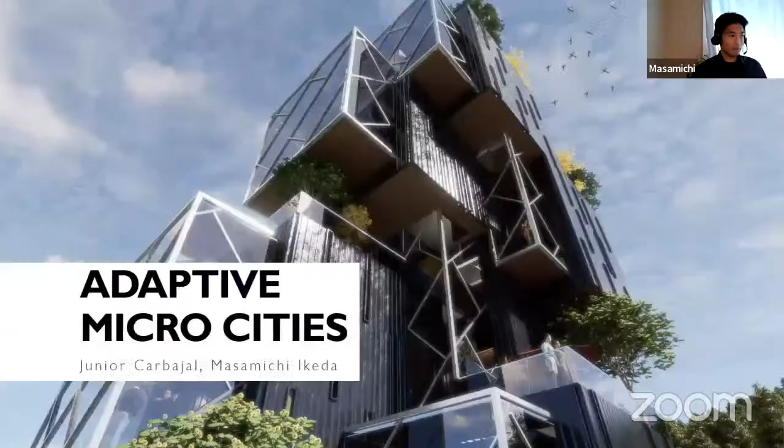Okay, Junior, do you have control now? Yeah, let me check real quick. Okay, sorry about that.

Okay, so first off, we'd like to thank the AISC for giving Masamichi and I the opportunity to present our idea on your platform, and most of all, thank you for picking our design as one of the top three finalists. I read the other contestants' ideas, and I'm very impressed with their creativity and what they have to offer. It really is an honor to be sitting here presenting next to them.

So the title of our project is Adaptive Microcities, because we're intrigued with the idea that architecture, when utilized as a vehicle and injected with human energy, can have the power to rejuvenate desolate spaces and turn them into desirable places—places we work, places we live, and places we play. We begin by asking ourselves: does architecture have the ability to draw people in? And by delivering those people, can their existence help change a community?

And so we looked for an opportunity to explore this idea further and found the Linton neighborhood here in Portland, Oregon, located about eight miles northwest of Portland, to be a really great fit. Now, the problem with this site is that historically, the Linton neighborhood has been damaged with industrialization and the abandonment of smelting plants, lumber mills, and oil refineries. What was once a practical use of Linton's riverfront has now become its own social demise.

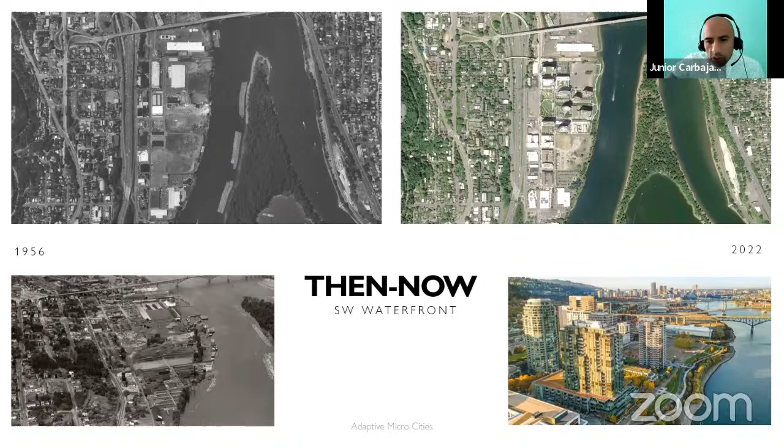And so again, we can begin to revitalize the Linton neighborhood, or better yet, create a microcity. On the site, we aim to explore this idea by creating a park with numerous activities that can harvest human presence, like an amphitheater for live music concerts or a farmer's market, just to name a few.

And of course, building a catalyst that can spearhead the movement, one that can capture the essential elements of everyday life, which we believe is work, life, and play — what we all pretty much do.

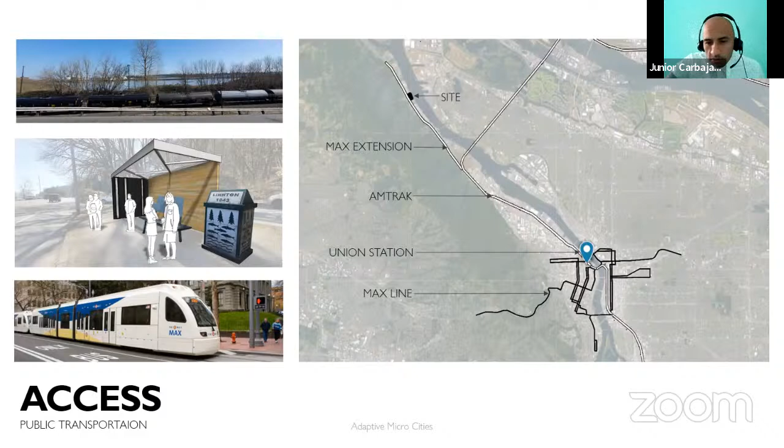And so we like the idea of repurposing the existing train tracks by extending the current MAX line into the Linton neighborhood, essentially connecting to a greater mass transportation network at our site, possibly utilizing the same design language as our building for the stops, to sort of hint at the main stage down the line.

And so given the constraints, we wanted to build a system that is simplistic, could speed up constructability, and have the flexibility to be assembled and disassembled for repurposing in other locations — essentially a panelized system, like a kit of parts. And we quickly realized that these qualities are inherent in steel construction.

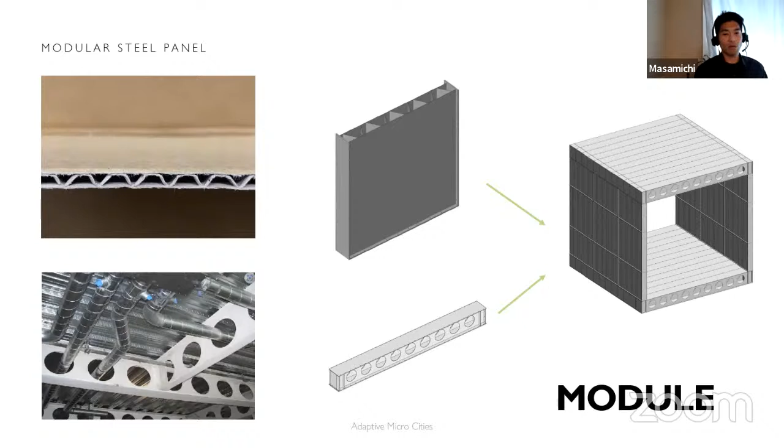A 30 feet by 30 feet cube box is constructed with the combination of the modular panel and box beams. The corrugated steel plates inside play an important role in the structural strength. Capacity against compressive shear and moment load can be increased by the corrugated steel.

And so now that we have these cubes, we allow the size of the site to dictate the overall shape by going straight up, acknowledging that the homes on the hillside sit higher, which permits our building to go vertical. We start looking at the steps for how this thing began to take shape.

So by first stacking the cubes to accommodate the program needs, and then step number two, to create a microcity, we partition these cubes into three primary groups. And then step three, shifting them in the x-axis to create summer shading overhangs for south-facing facades.

Moving on to step four, we shift them in the y-axis to create terraces and public spaces. And then step five, we shift them one last time in the z-axis to interstitch those volumes together and lower the overall height. Finally, we extrude them one last time, extruding cubes inside cubes to maximize the view of the river.

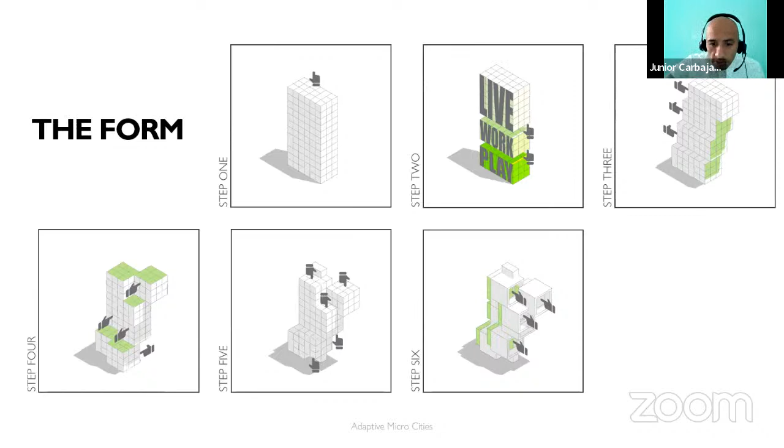This allows indirect north-facing light for natural illumination, and this final shift also further shades the south-facing facades from the summer heat, but also allows the winter sunlight to enter and passively warm up the spaces.

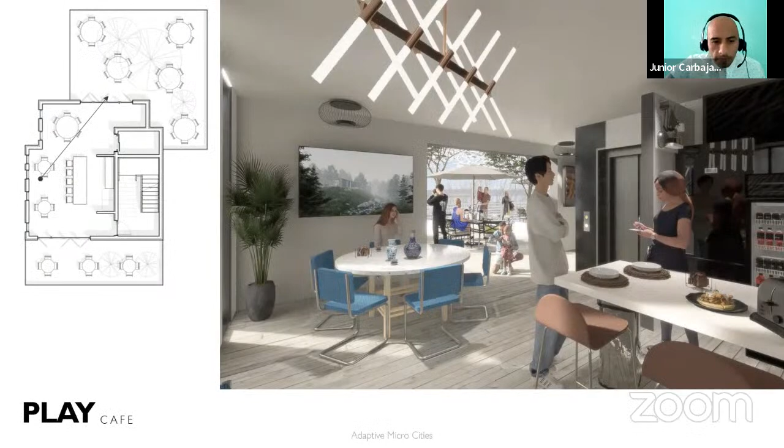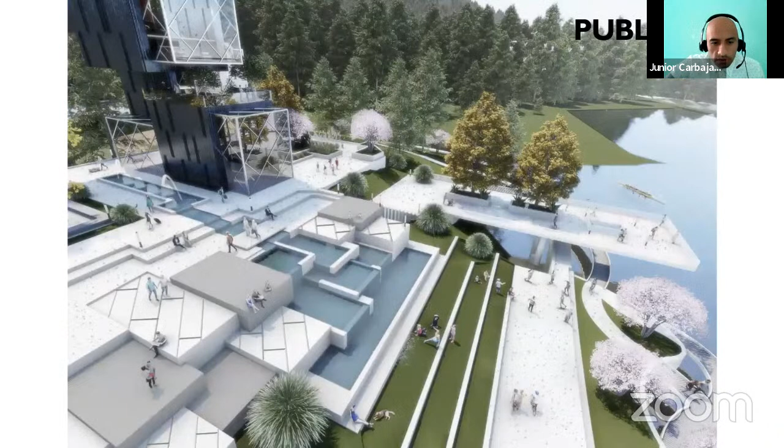So then we step out to the outside and we can see what this thing could look like in typical Oregon rainy weather. Another view from a different angle at sundown. And then from above, looking at the public rooftop gardens at the resident levels, and another 3D perspective of the public space where people can gather and collaborate.

And so speaking of collaboration, we would like to personally thank Jim for sharing his vast knowledge in steel fabrication and building erection experience. It was because of him and his team at Alpha Steel that we were able to look at this design in a whole new lens and gain so much more knowledge, not only for this project, but for our personal careers and development.

We had the opportunity to visit a state-of-the-art shop and learn so much more about steel and how it's utilized to push the boundaries in the AEC industry. During our conversation about how this thing could be erected, we pretty much stayed focused on new ways of construction: how to speed up the construction, the modularity of the system, transportation, sustainability, and of course, costs.

Okay, now this is an exploded structural model, and there are a total of 8 cubes surrounding the core structure to provide the habitable space to the building. The core structure is located at the center of the building to support these cubes, just like a tree trunk.

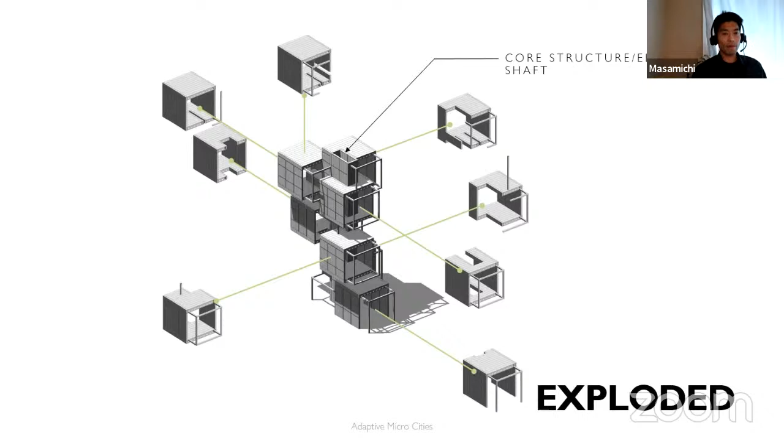There's another reason why we selected the size and shape of the wall panel and the beams. The rectangular box and square modular panel are very efficient when it comes to transportation. They can be stacked on each other horizontally and vertically without too much wasted space. Modular panels and box beams can be loaded on a flatbed truck without exceeding height and width limitations in regulation - for example, in Oregon, 14 feet for the height and 8.5 feet for the width.

Now, let me talk about the assembly. The core structure plays an important role to support the cube boxes, but it can also be used as a tower for the tower crane. Since the site has limited space, it could be difficult to bring large equipment.

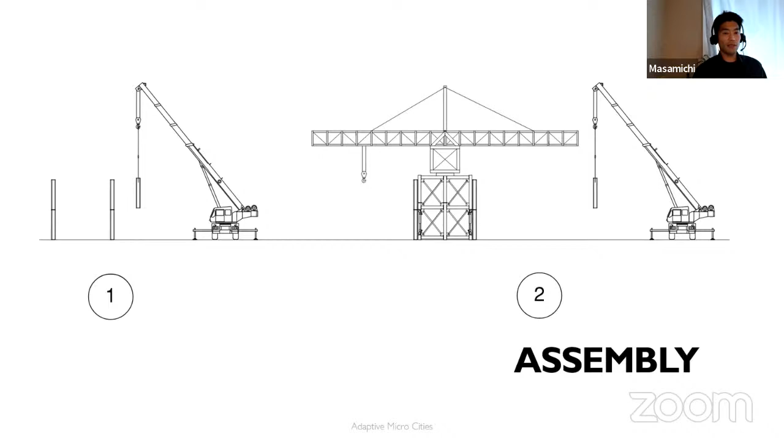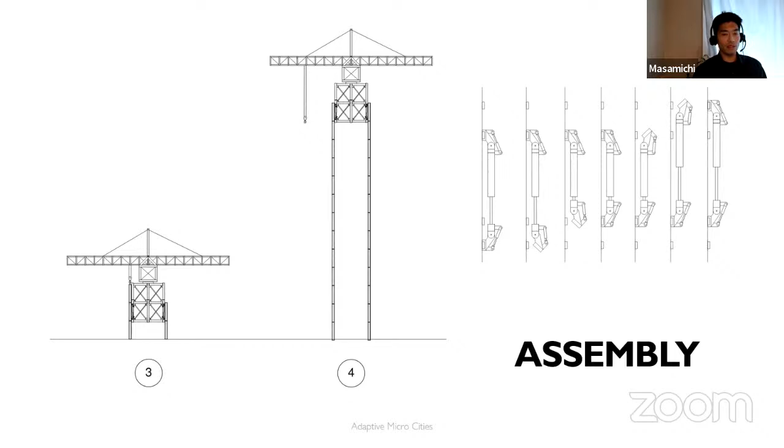So step one, with a small crane, the core structure is installed until a certain height. Step two, install the tower crane inside the core structure, and then install the crane boom. Step three, the tower crane installs more wall panels of the core structure and jacks up the tower crane itself with a hydraulic cylinder, similar to climbing tower crane technology. This operation is repeated until the wall reaches the required height - that's step four.

Next, step five, the cube boxes are assembled on the ground. Just because of constructability, it's much easier to assemble everything on the ground. However, the cube box is a little too heavy for the tower crane - we estimated about 50 to 80 tons. So our idea is that temporary bracing is installed for the cube's stability until the cube is completely attached to the core structure. Then the cube is lifted up with multiple hydraulic cylinders along a guide rail, as shown in the pictures, attached to the core structure. This operation is repeated for the other cubes as well.

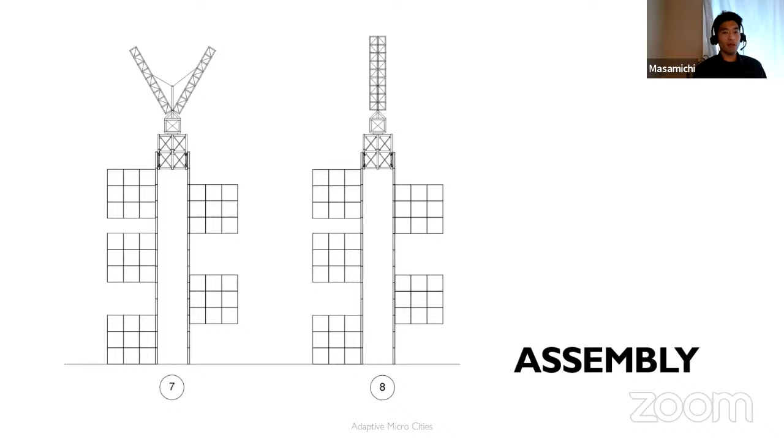So once all the cubes are installed, and then all components are installed, the crane boom is completely vertical now. Then we lower the tower crane, install it inside the core structure, and keep it there. Disassemble the tower crane and remove a part of the core structure. Install the staircase and elevator at the end.

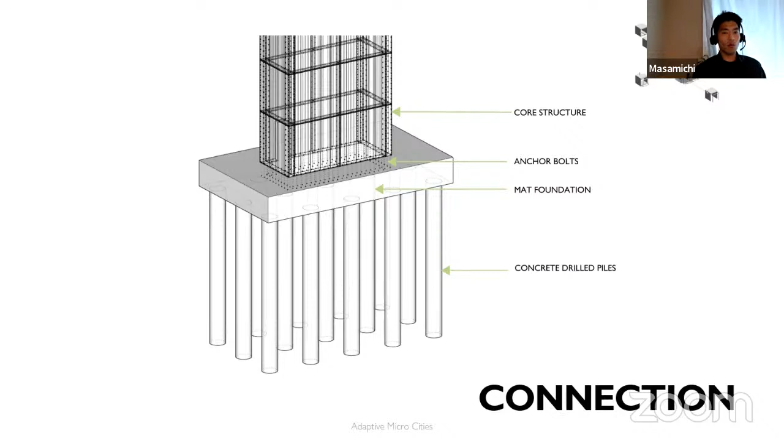Foundation of the core structure is crucial. The core structure is attached to the mat foundation or pile cap over the concrete drilled pile. When a wall of the core structure is installed, the erector will work on the platform. However, the erector still only has access to the panel from inside, so the connection is a little tricky. So we came up with this idea: keyways were provided on the outer wall of the panel so that the erector doesn't need access from outside.

The keyway is slightly tapered so that the connection has tight contact, and then the wall panel is slid horizontally to connect the keyway together. This is a corner connection that's very similar to the other connection.

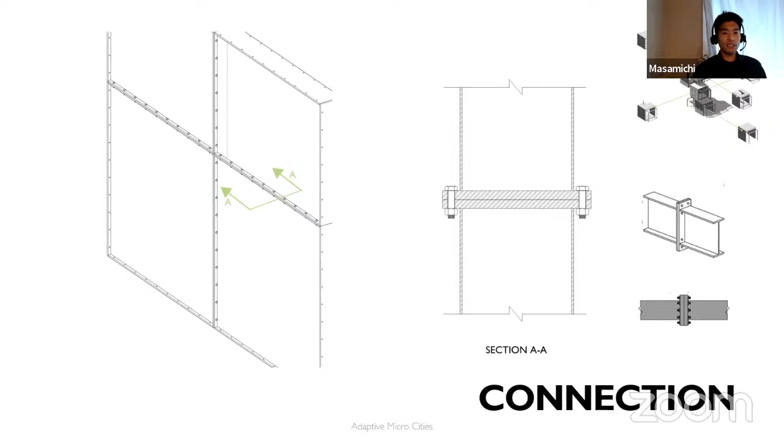Since cube boxes are assembled on the ground, the erector has access to both sides. This is similar to one of the moment connections or a pipe flange connection. They are easy to disassemble; our goal is to make the material reusable.

To enhance construction speed, some utilities are installed to the wall in advance, both inside and outside. When a wall panel is connected, the utility line also connects together. So the channel attached to the outer face of the wall panel carries the IMP, and the channel attached to the inner face is the hat channel. Our goal of the connection is that we can disassemble a wall board or IMP easily so that the wall panel is reusable.

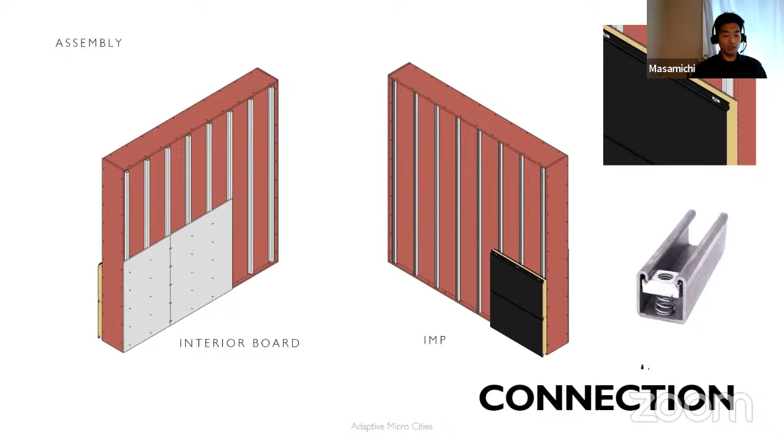This is a beam to the wall connection. Again, this is very similar. So everything is bolted to the connection.

Okay, so now the beauty of our modular system is its adaptability and flexibility. With this concept, we found that we can overreach this idea of the panelized system that can take many different shapes and also serve other purposes and aid human needs.

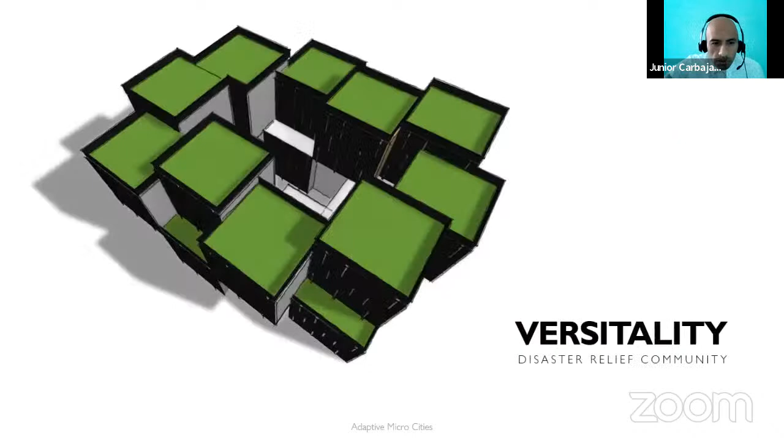For example, in a crisis, we can create shelters for the homeless, or as a resiliency effort, helping communities after natural disasters by providing temporary housing communities for survivors. And perhaps the form can take different shapes, like horizontal, creating internal courtyards for people to gather.

And so finally, to close things off, we also looked at other current systems for inspiration and feasibility, like the SIP homes being built in Santiago, Chile. Thanks to Rona for giving us some examples, the Expo 67 apartments in Montreal, Canada. And finally, a more recent project, the Coho apartment complex in Fort Worth, Texas, built strictly out of shipping containers.

And like I said, all of these precedents helped us understand and further develop our design and its possibilities. And with that, we thank you for listening to Masamichi and I. Thank you.

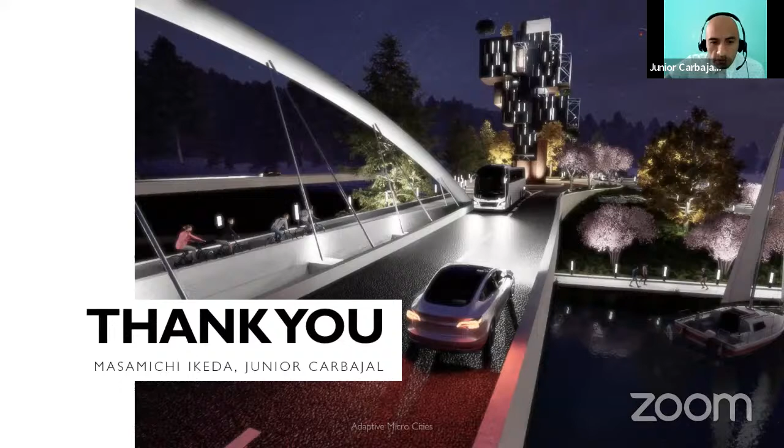I'll jump in really quick. Masa, this was great. I know we spoke to you a few weeks ago, and you did take a lot of our comments to heart. I love that you thought through the logistics, right? You're taking a very basic shape, a steel cube, and truly looking at how you can assemble it, how you can transport it. What we're looking for in our arena of design and construction right now is speed to market, and the ability to be flexible and adaptable, and you're thinking through a lot of those things. So I appreciate that, and I appreciate that you created these beautiful renderings that allow us to visualize the units and what they could become. So it is very inspiring.

The one question I would have for you is, I see how this is scalable. I see how you can easily install it and assemble it and get it to the right places. But you also spoke about human energy, right? You're looking at the interaction of something that is steel, a cube, with humans. I think what I would ask you is, when you started this process, who was your targeted user, your intended user? I see the site, I understand what you're trying to do with it, but I'm curious to hear from you.

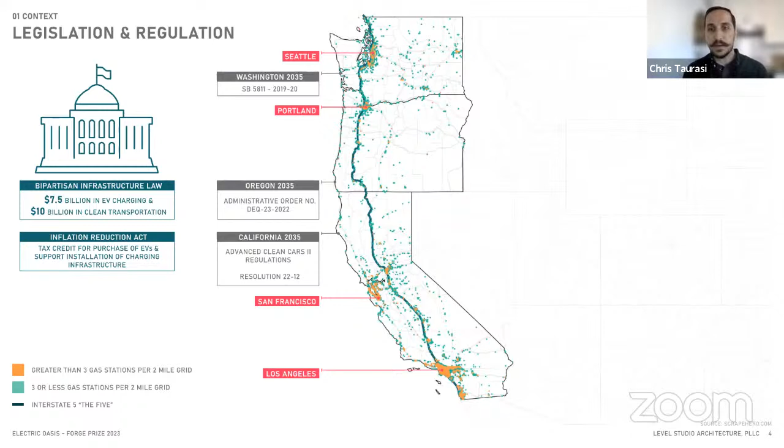So our project is really focusing on the West Coast. As you can see on the map here to the right, we utilized GIS data to locate all the gas stations that could possibly be retrofitted to meet electric vehicle needs in the future. Zooming into California, we picked a site approximately 200 miles outside both Los Angeles and San Francisco - it's important to note that 200 miles is the current charging radius for most electric vehicles.

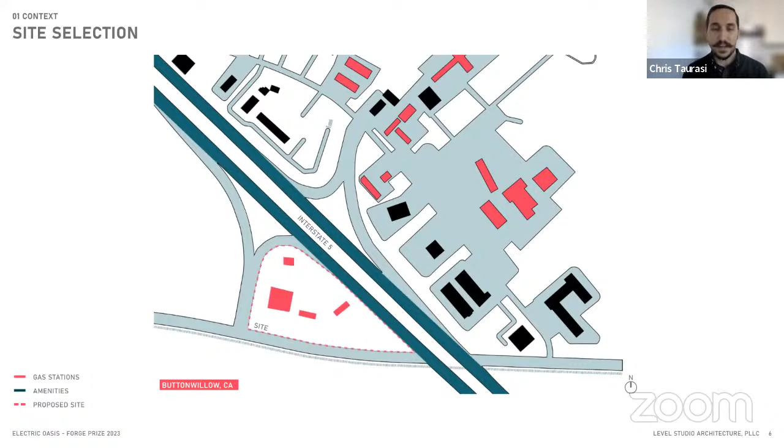And zooming in a little bit further, we picked a small rural farming community called Buttonwillow in California. It's about 1,500 people. The demographics are predominantly white and Hispanic, with a population of 33% non-US citizens, and 59% of the households have children. As you can see, this junction looks like many others along this stretch of the interstate. As you pull off, you're greeted by many gas stations, highlighted here in pink, and ours is the site on the lower left.

Right, so next we're going to dive into some of the problems we see and the opportunities that present themselves.

First, there are some major differences between gas refueling and electrical charging. Traditionally, gas station infrastructure requires larger clearances at pumps and around vehicles, while electrical charging allows for a much higher density, and the vehicles can be left unattended while charging.

Second, and possibly the greater change, is that electrically charging a vehicle takes significantly longer. On average, a gas stop takes around 7 minutes to refill a tank, while a level 2 charging station, the most common type, takes upwards of 4.5 hours for a full charge.

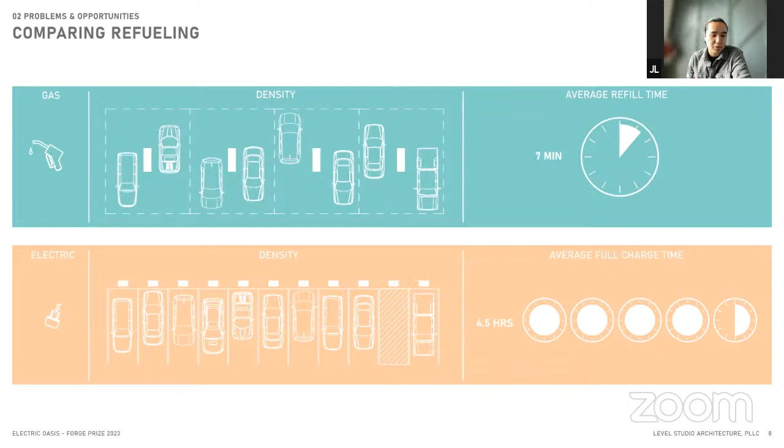So considering these major differences, it becomes pretty clear we have an opportunity to reimagine the gas station typology into something that can revitalize local economies.

Looking at the current landscape of gas stations, we typically see just 2 programs: dining and restroom facilities. With the anticipated longer stays, we can introduce more human-centric programs that the community needs. For example, on our site, we see the potential to introduce a daycare and a health clinic.

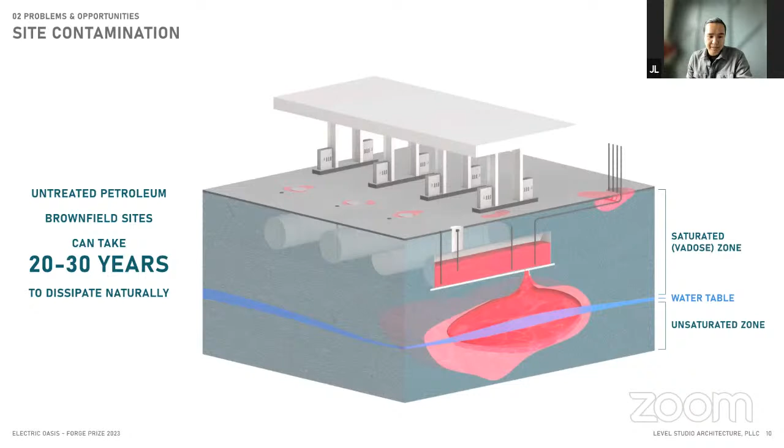Another major issue we run into when looking to reuse existing gas station sites is that they are often contaminated brownfield sites due to petroleum leaks at the surface and subsurface levels. Left to their own devices, these sites can take up to 20 to 30 years to dissipate naturally.

And finally, as we mentioned earlier, we are far behind the future demands of EV chargers. In California alone, an estimated 1.2 million EV chargers will be needed by 2030. Currently, we have just over 80,000. With all the new state and federal legislation, and more to surely follow, EV car sales in the US will only continue to grow.

Considering this impending demand, steel construction with all of its benefits, such as its ability to be mass produced, rapidly assembled, fabricated off-site, and its recyclability, quickly becomes the obvious choice to meet the challenge.

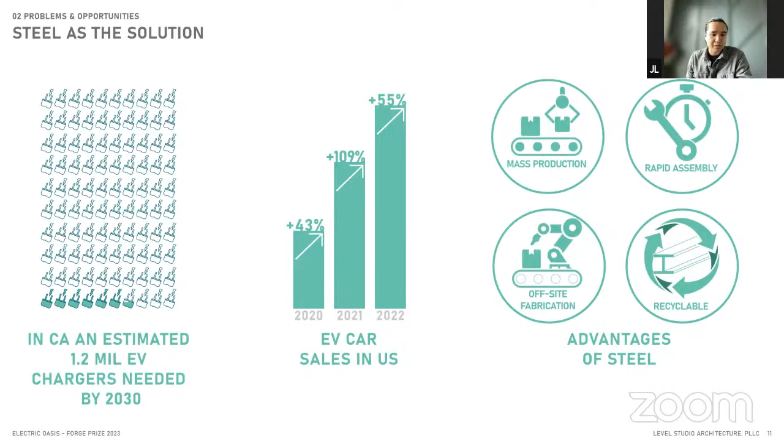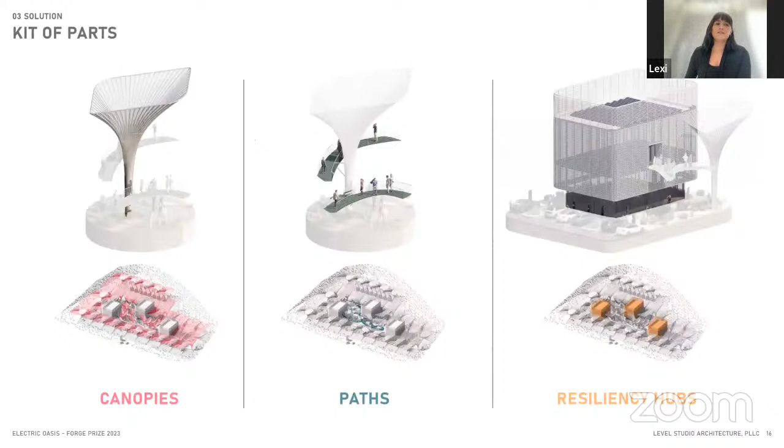On the second level, the elevated pathways are highlighted here. Our architectural solution is composed of 3 key components: first, the tree-like canopies; next, the elevated pathways; and third, the resiliency hubs.

I'm going to dive into the canopy system first, which includes 5 modules: 2 of which are large 60-foot long spanning structures, and 3 of which are taller structures, which the elevated pathways affix to.

You can see on this next slide the materiality of the canopies, including a cast steel column, a shop-finished HSS tubing, and a steel mesh that spans between this tubing for shade.

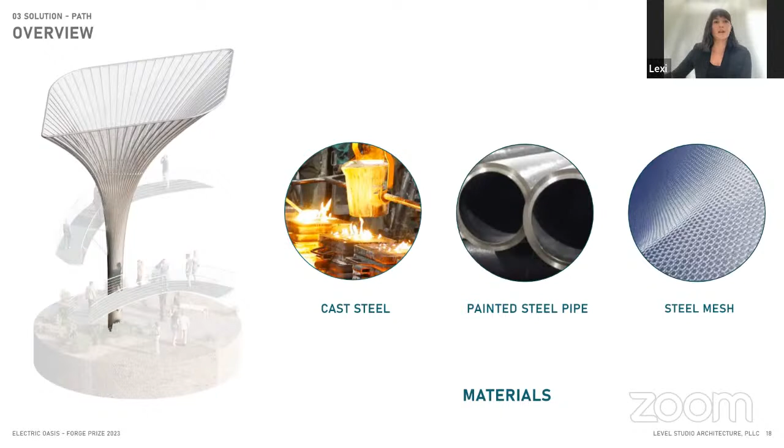While our proposal highlights sun shading as the primary function of the canopies, we see alternative functions that could be served depending on the site and location, such as solar, water collection, or acting as a green armature, which we'll preview at the end of the presentation on alternative sites.

As Jeff mentioned, part of our goal for the project was to remediate the site in addition to the design proposal. So we met with a California-based environmental consulting specialist who advised us on the typical process per California's standards using the LUFT manual.

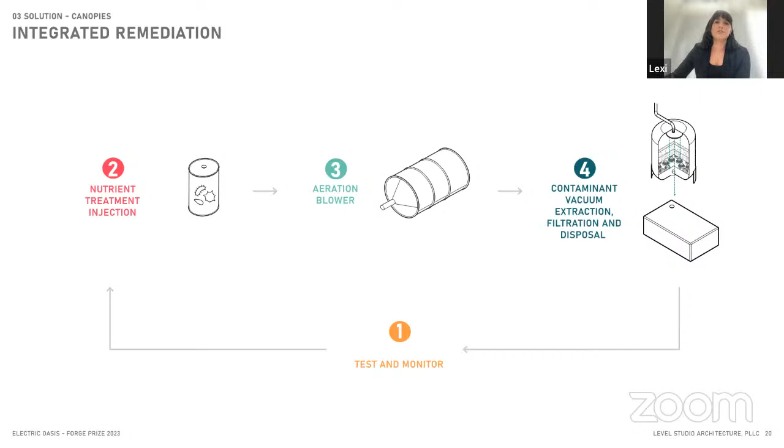We went with a soil vapor extraction process shown here, which is basically repeated until the site is deemed clean. This is integrated into our design within the remediation armature embedded in the helical pile footings at the base of each canopy module. By integrating this infrastructure, the design allows the remediation to run concurrently with construction, speeding up the overall timeline.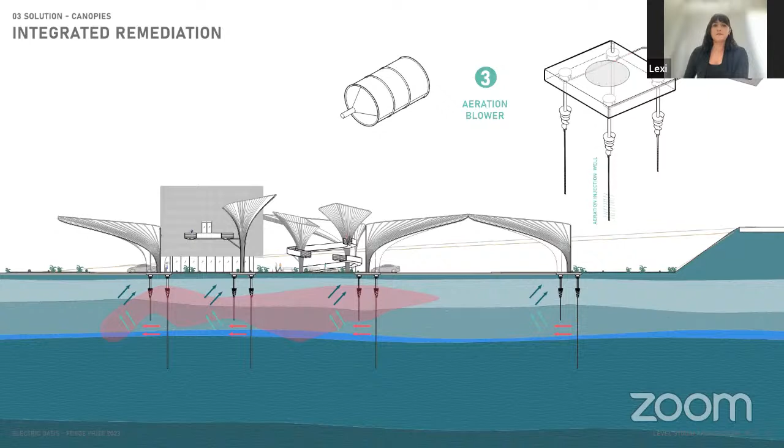The first step in this process is initial testing and assessment, followed by a nutrient injection to help clean the soil. Then an aeration blower forces air contaminants from lower in the subsurface up higher, where the vacuuming armature then removes the toxins from the soil and takes them back to the central treatment system.

Now we're going to walk through some of the more technical drawings for the fabrication of the canopies, which we were fortunate enough to dial in with the help of our mentor, Chris.

The canopies are structurally composed of 3 main sections: first, the foundation we just discussed; second, the cast structural steel column; and third, the HSS pipe canopy above.

Starting at the base, we can see the column plan consists of a cast inner honeycomb structure. This structure allows for connection point locations around the entirety of the column.

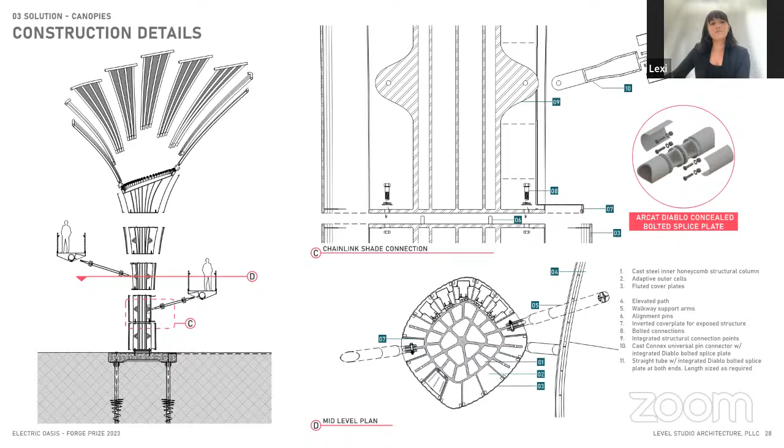As we move up, we begin to see the armature connections to the elevated path at the bolted pad eye connections. The armatures make use of concealed splice plates, and bolting connections are intended to facilitate a speedy install of the modules on site. Finally, as we reach the top of the canopy, we see where the cast column transitions to the tubing.

This transition uses the same concealed splice plate. At the top of the sheet, you'll notice a sectional detail showing the typical bolted connection of the shading mesh.

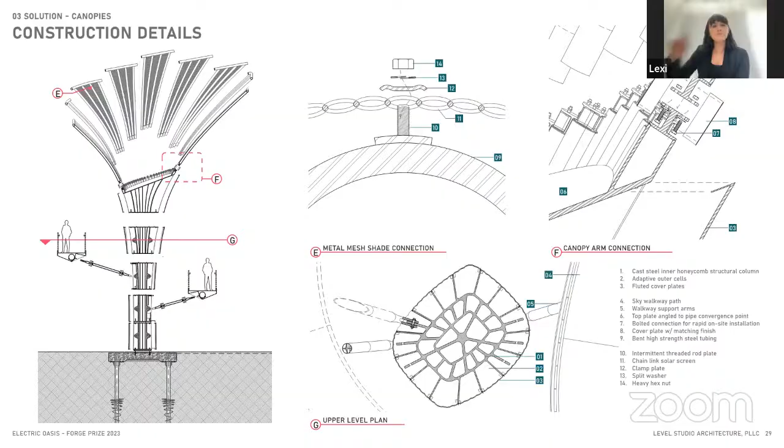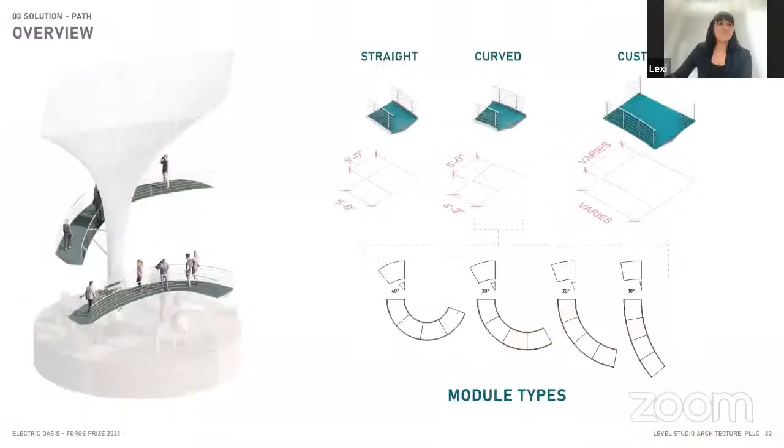Right, so the next component is the path. We've modularized the construction into 3 main types: straight 5-foot long sections, curved sections at varying angles, and custom landings for the connection to the different resiliency hubs.

Again, here we utilize bolted connections and friction fit panels to expedite the installation process. Each module is prefabricated and finished in the shop with colored slip resistant high traffic coating, and fitted with painted steel tube handrails and guardrails.

As we mentioned before, with these drastically increased refueling times, the idea was to introduce a meandering elevated path with scenic views as a means to create a sense of destination, bringing a park-like experience designed as a 15-minute loop that ascends 20 feet.

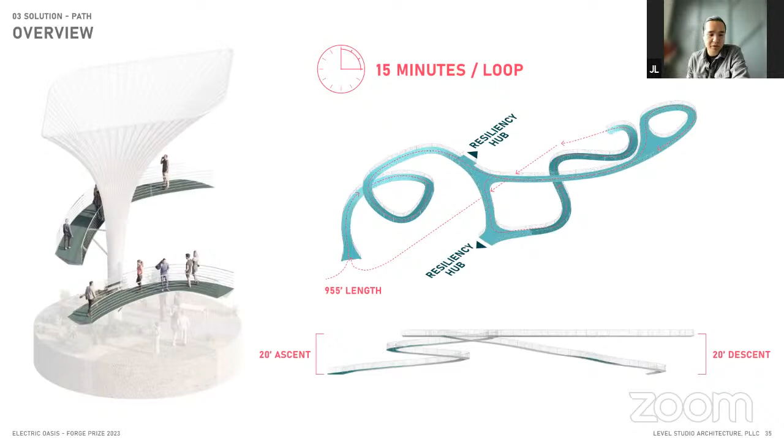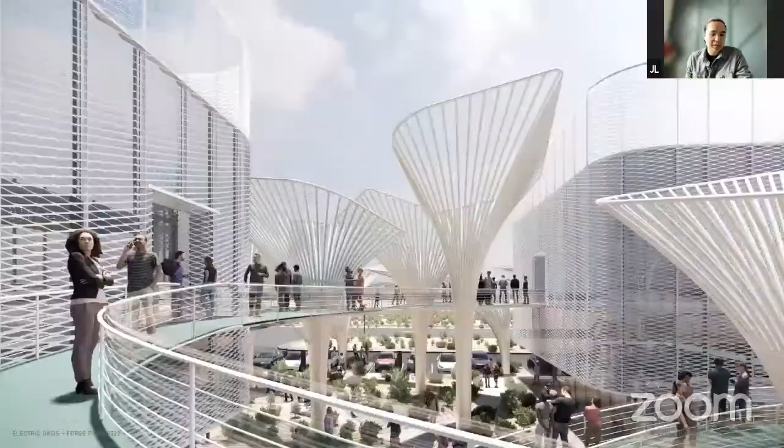At the top of the path, we come face to face with the canopies, and we can also begin to see the connections to the different resiliency hubs. It's at these resiliency hubs, which Chris will cover next, where we're really able to redefine the fuel stations as more than just a transient stop, and begin to give some agency back to local communities.

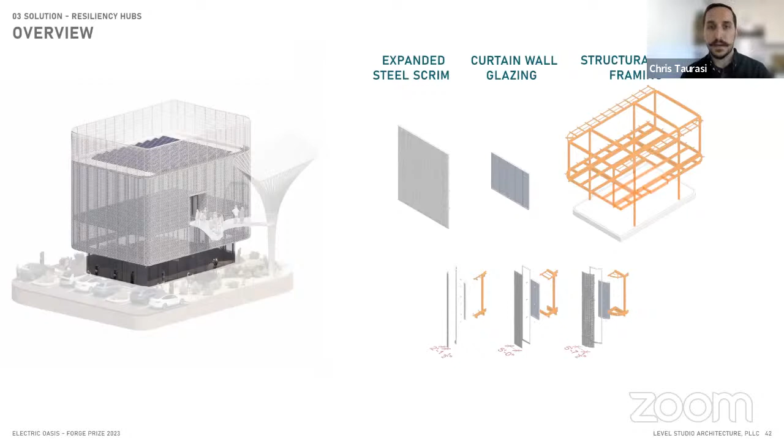Right, so as Jeff mentioned, I'll be covering the final site element, the community resiliency hubs. As you can see here, they're built out of structural steel framing, clad in curtain wall glazing, and an expanded steel scrim. All of the components are modularized for ease of construction, and on the roof, you'll see PV panels to support the electric vehicle charging function.

Similarly to the path, these resiliency hubs help to create a destination by providing versatile programs based on community needs.

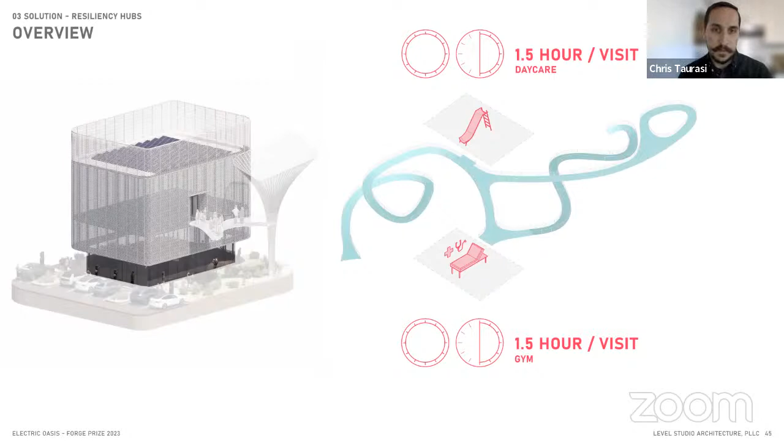Next, we'll see a section through a resiliency hub with a series of details. Big picture: it's structural steel bolted connections throughout, curtain wall glazing, expanded steel scrim, standing seam roof, and PV panels.

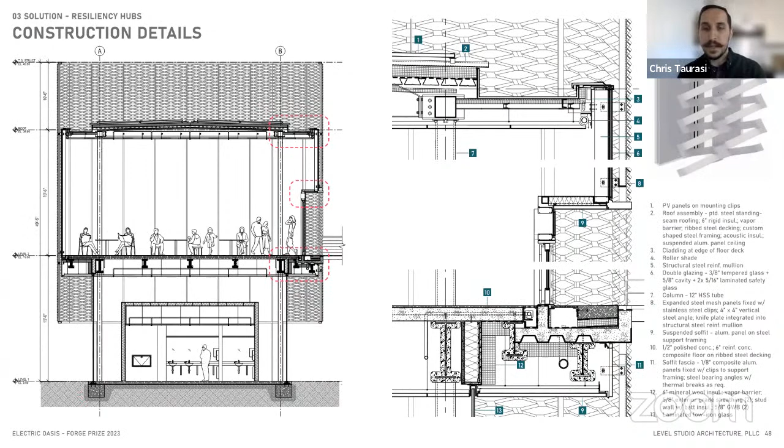Continuing over the section, we see again the PV panels, standing seam roof, expanded steel scrim, curtain wall panel, and the recessed entry point into the resiliency hub with the connection back out to the path.

First, the panelization breakdown of the canopy. The column is broken up into separate cast steel trunks, and the large span canopy is broken down into a number of pre-assembled groups. On the far right is a theoretical shipping arrangement and approximation of trucks required to ship to site. With the high volume and number of identical pieces we're working with, we'd definitely be using reusable rigging to reduce overall waste.

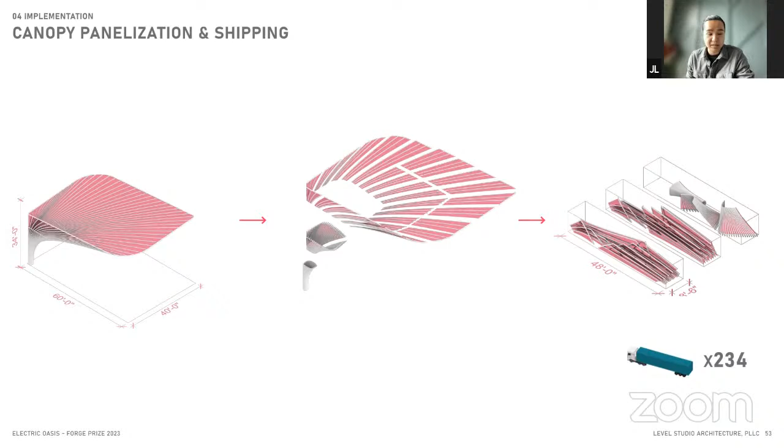Next is the path, broken down into separate component parts and shipped in 5 trucks. And finally, we see the resiliency hubs broken down into their component parts and shipped in approximately 24 trucks for all three.

To help visualize the transition of the site from the petroleum-based gas station to an electric charging facility, we've produced a series of construction diagrams. Shown here is the existing gas station, where an initial soil testing and site assessment would be done.

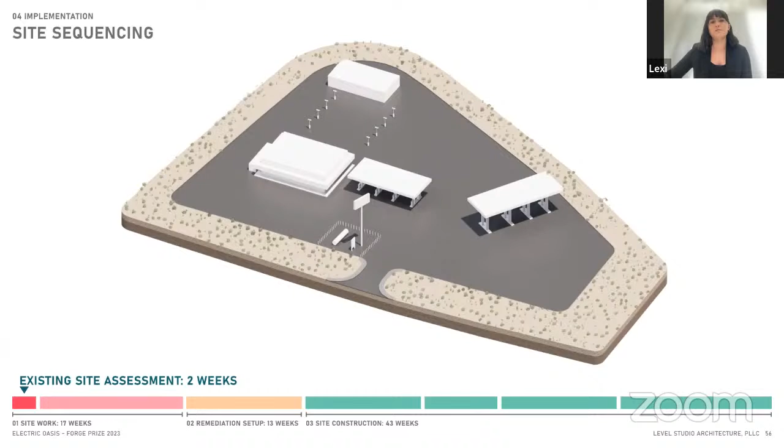This would be closely followed with the demolition, soil tilling, and grading phase to prep the site. Then the remediation, infrastructure, and establishment of the treatment system would follow. The off-gassing from this treatment system could support the initial energy needs during construction.

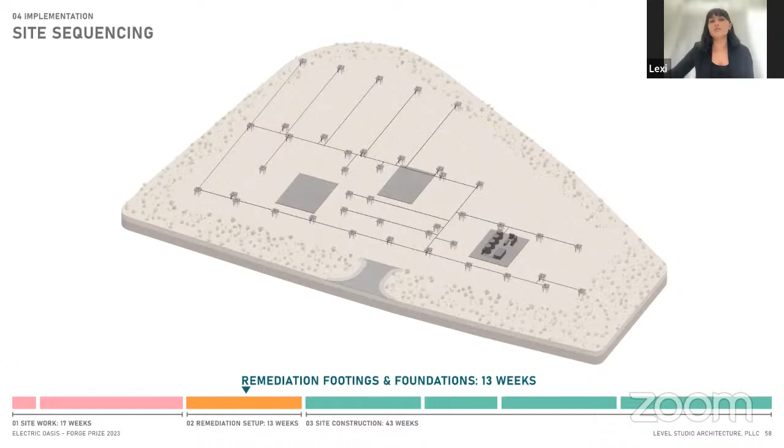At the next phase, the prefabricated modules will begin to arrive at site, delivered to the staging area. The smaller canopy modules, taking roughly 3 days for install, are erected in the central allee, and the first resiliency hub is constructed. Then the 2 remaining resiliency hubs would be constructed, and the 5-foot-long pathway modules would be hung from the canopy modules.

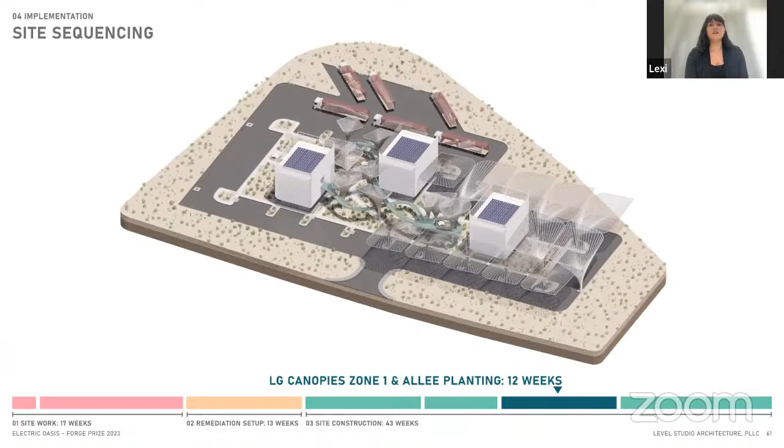And then finally, the initial larger canopies would be erected. Xeriscaping could begin in the allee, and at this stage the functional components for visitors are in place, and the site could be open to patrons starting in this first zone.

And then finally, the remaining large canopies would be erected, and the Oasis would be fully open to patrons, with a total estimated time of about 73 weeks.

We've also looked at applying this kit of parts at alternative sites along the West Coast. This first site, shown here in the Oregon mountains, the goal being to use it as a green armature to blend into the environment and support the local biodiversity at this location.

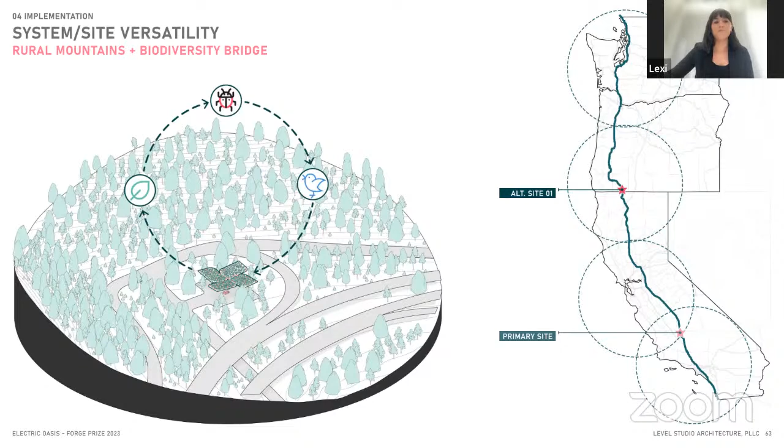This next location in the suburbs of Portland, we envision being able to swap the mesh for a tensile fabric and use the canopy as a rainwater collector. And then finally, at an urban downtown Seattle site where photovoltaics could attach to the canopy, the module could be scaled down to the size of a single parking space and potentially also charge e-bikes in addition to vehicles.

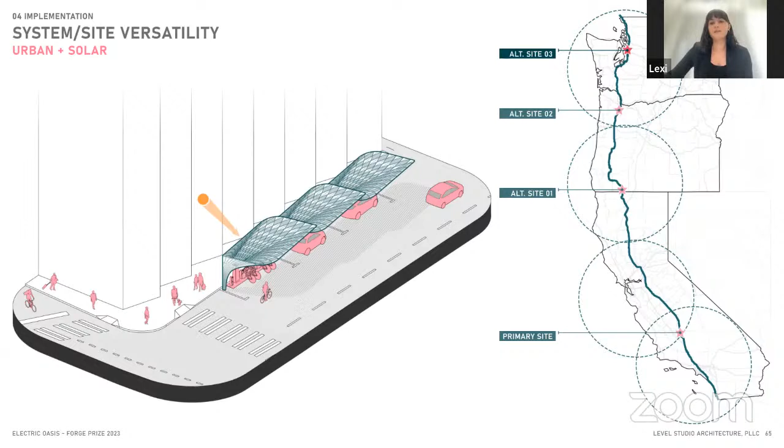So in closing, our proposal utilizes the impressive properties of steel, remediates the site, while reimagining the traditional gas station visit from one that's banal to a more human-centric experience. We're going to play an animation in the background while we open it up for questions. Thank you very much.

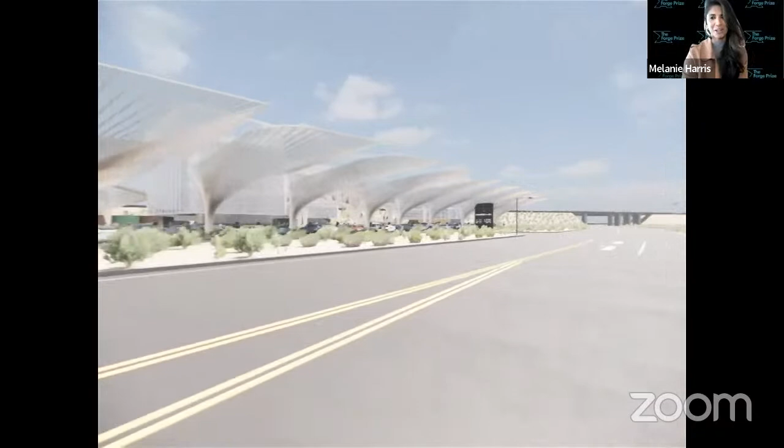Can you hear, Alex? If so, let's go to Sean next. Are you good? Can you hear me?

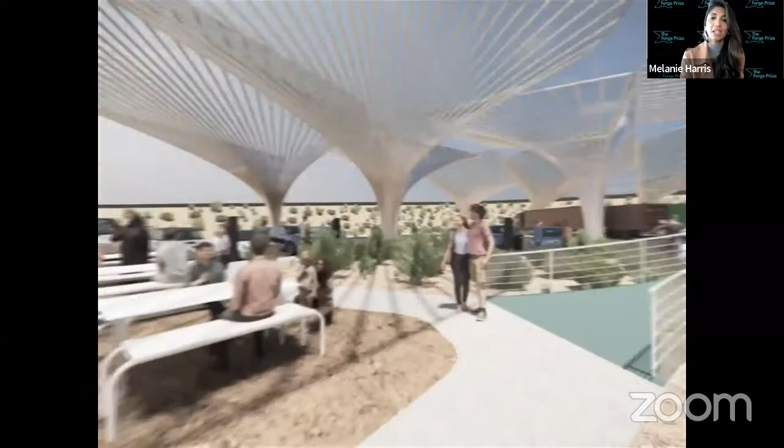Okay, I will start by saying I love your concept. I think what I find really intriguing is you've taken something banal—we do this all the time, we get into our vehicles, drive somewhere, and go get the gas filled. Obviously we're looking at electric vehicle charging now, but you've taken something very mundane that we give no second thought to usually, and injected a certain level of magic into not just waiting for the charging, but also what you can do with that time. So I love it for that. We're all looking for efficiencies in our life nowadays, and the last thing we want is to wait around and do nothing while our cars charge. So I appreciate you taking the time to do this. I also know one of my biggest comments the last time we met was how do we locate something similar in different regions, can you adapt it to different areas? And you have showcased how you would do that. So I very much appreciate that too.

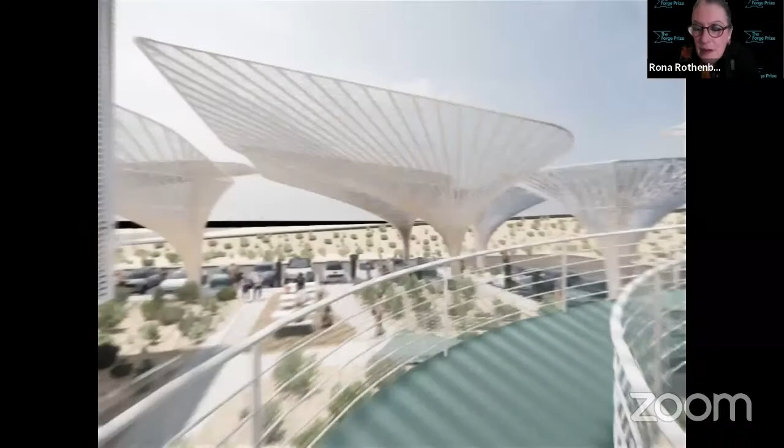I agree with Sean and Melanie, and I don't have too much to add in addition to Melanie's comments about the thorough concept, both from the test fit and site aspects to the functional and technical criteria, production, logistics, cost, and the features you set to a specific location.

I'm guessing it's along Route 5. I've actually been there, up and down that stretch, but I don't know that particular spot. We have our spots where we stop, and I tried not to drive it too much over the years, although I've made probably over 100 trips to the Central Valley.

But applying it to a real life setting and then showing us the alternative settings and different scales is totally appropriate and relevant, and it really brings the concept to life. I totally agree with Sean about expanding the concept, perhaps beyond the scope of this particular competition, but expanding it also to other geographies.

Just to pick something, I hope I live long enough to see one of these actually get built. But if you've driven from New York to Washington, D.C., that stretch through New Jersey, there are a lot of opportunities, big rest stops. So the concept of having a pro forma with a public or a private sector developer—some of the roads are public, some of them are private—repurposing not just aging gas stations, but aging shopping centers.

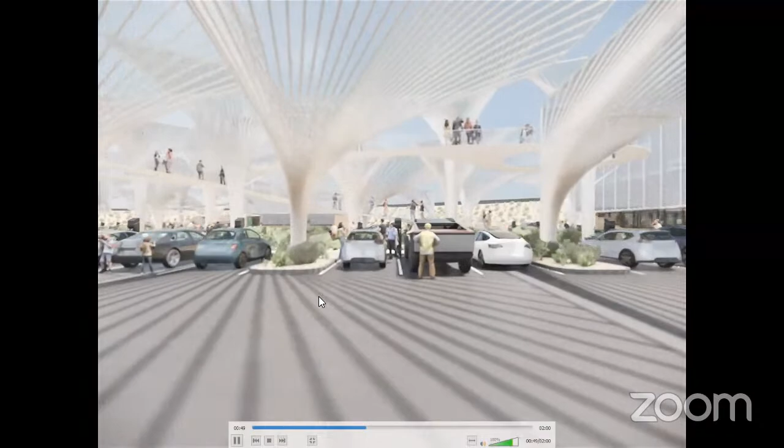Thanks for that, Rona. Appreciate you, Rona. Thank you so much. Okay, so let's move right along to Then Le. We could stop the share and Then, take it away. Sure.

Hello everyone, my name is Then Le, and I'm excited to share with you my proposed project. It's called Transconnect. It's located in SoMa, San Francisco, and the purpose of this project is reshaping the modern commute in urbanism.

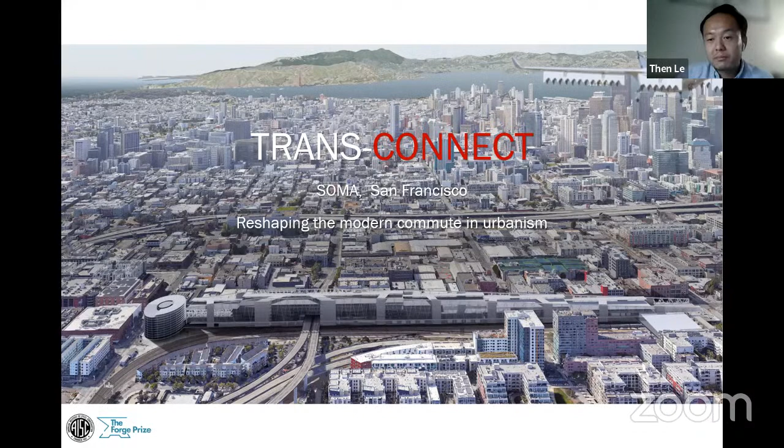Transportation has been an integral part of our daily commute, and its evolution over time is common knowledge - from travel by boat, train, bicycle, car, and airplane. The history of transportation has been an incredible journey. However, investment in transportation technology is not limited to these traditional modes. Now we're witnessing the emergence of more sustainable options like eVTOL, standing for electric vertical takeoff and landing aircraft, Hyperloop, a concept proposed by Elon Musk, autonomous cars, and even smarter EVs.

In this project, I aim to introduce eVTOL technology to San Francisco and the Bay Area, which will provide a more sustainable mode of transportation.

To better understand how sustainable transportation can play a role in our daily life, I believe studying the geography and population of San Francisco, particularly the SoMa neighborhood, is important. San Francisco had a population of over 800,000 with a median age of approximately 38, and the average car ownership per household was only 0.43 in 2019, as opposed to the national average of 1.9. Given the city's high population density, it would be informative to understand how car sharing services such as Lyft and Uber are utilized throughout the week, and how long commuters spend, on average 20 to 30 minutes, traveling to and from their destination.

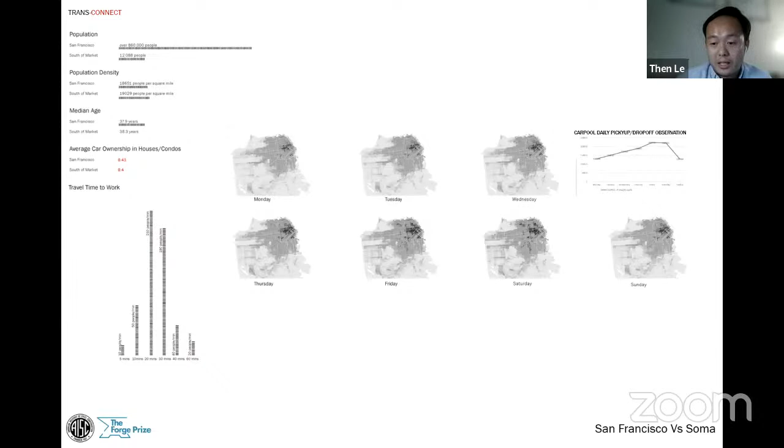The SFMTA is forecasting a 25% increase in jobs and a 15% increase in population by 2035, and is currently struggling to secure funding for the transportation system. Furthermore, the various modes of transportation available in the city are not well integrated, and by 2035, only electric or zero emission vehicles will be sold in California.

That's why we need more sustainable transportation to align with our integrated living conditions. So it's about time to introduce a new eVTOL plan - we can call it an air taxi. This could be a promising solution to this problem, and I remain hopeful that this new transportation option can make a positive impact.

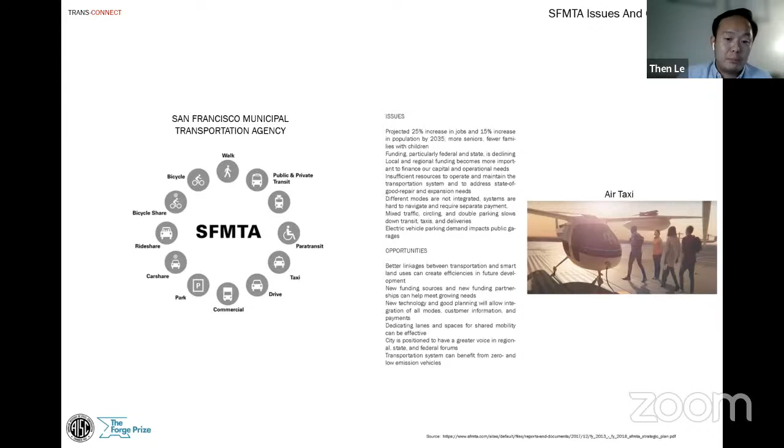Why did I choose San Francisco? Because I'm local here, and I see that despite the recent completion of the new transit center, Salesforce Center, it's not serving the city efficiently. Although it currently provides bus transit service, we will require a more comprehensive option in the future.

For instance, integrating the transit center with train and subway will require an investment of over 5 billion. That's why I want to propose converting the San Francisco Caltrain station in SoMa into a new mega transit hub. This is a more cost effective and timely solution.

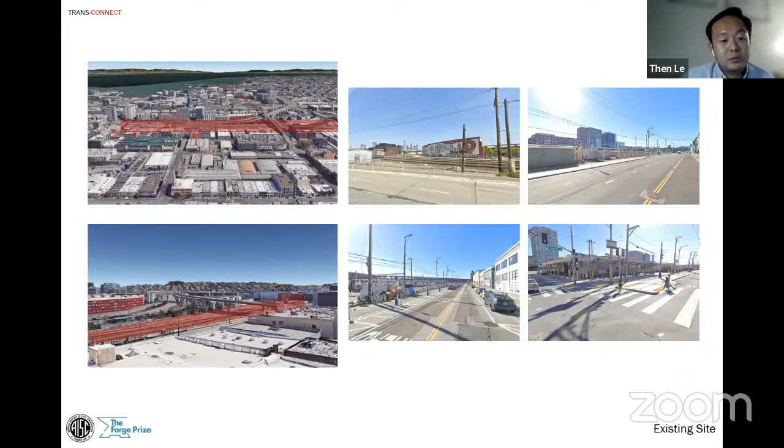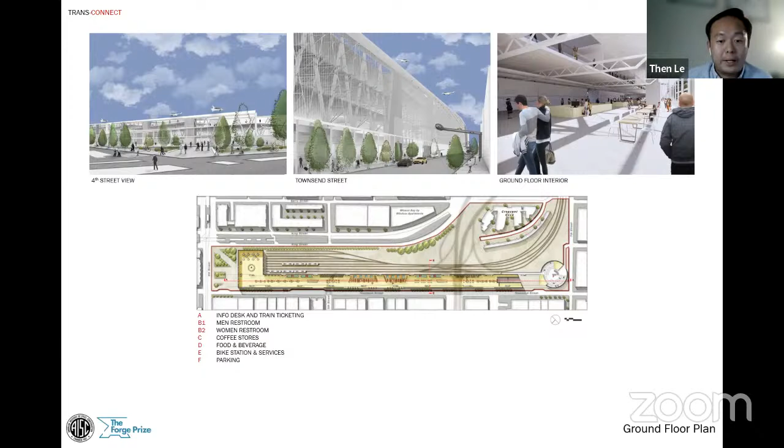As mentioned earlier, we noticed that I-280 crosses the site, and it is my intention to maintain this freeway route, because I think it's a crucial entry point from the South Bay to San Francisco.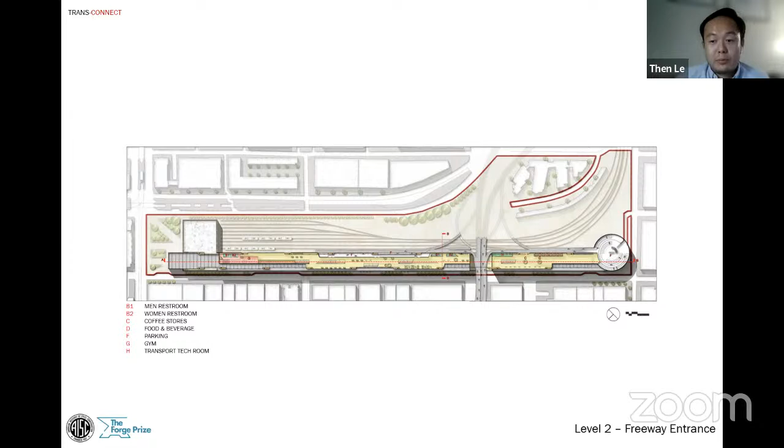In terms of design, I plan to include a tunnel that allows the freeway to pass through the mega transit hub. This floor can be utilized as a designated departure and arrival area for car sharing services such as Uber or Lyft, and I believe this unique feature has the potential to become an iconic element of the hub.

From this slide, I would like to show the design flow for the movement of cars entering the building and how people transition from Uber to different modes of transportation, such as train, air taxi, or even the bus.

I also propose a gym amenity for this floor to promote health and wellness. Imagine commuting to work, stopping at this transit hub to exercise, and then grabbing a quick bite to eat, and preparing for the work day ahead.

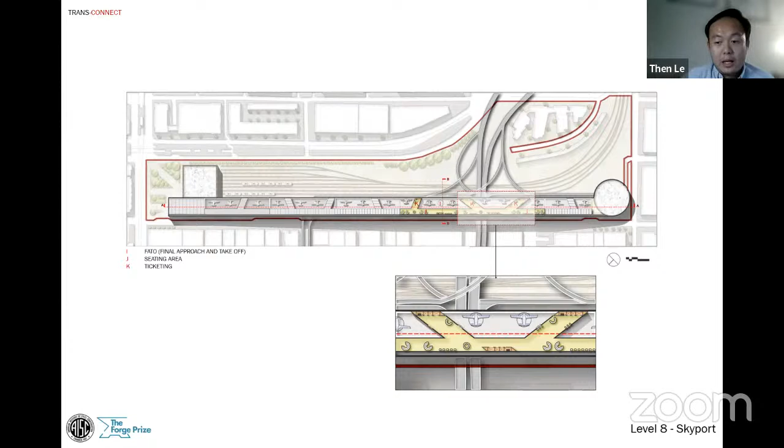So now this is a key feature for this proposed transit hub. Can you take air taxi for work, for school, and even for short distance travel? I think you can. In this study, we have three elements to determine how the air travel works. We call it FATO, the final approach and takeoff area, seating area, and ticketing.

And why am I advocating for this adoption of the eVTOL in our daily commute? Because I think it's a more environmentally friendly, faster, and safer mode of transportation. There are several startups working hard to bring the electric plane to the market right now, including the Germany Lilium Jet. It has a range of 300 kilometers, or 186 miles per charge, and a top speed of 300 kilometers per hour, or 186 miles per hour, with a capacity of 4 passengers and 1 pilot.

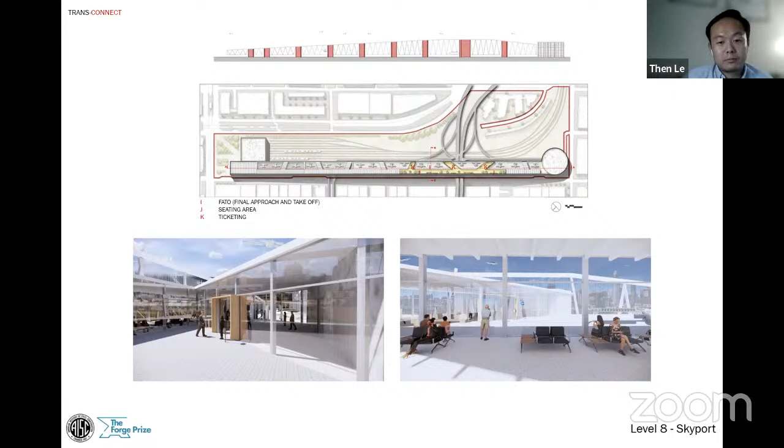This slide will show you the elevation of the building as well as the rendering of the experience from the skyport level. This is a very detailed section showing the various programs inside the building to cater to our daily needs, such as gym, outdoor park, rentable workplace, restaurant, short-term stay, retail store, along with the skyport and parking.

Why this is an exciting project is it's quite complex when you look at the building section. In this section, I will present various transportation options that interact in the building. On the ground floor, we have the bus and train station. The second and third floor is where the car enters the building. And then the skyport is located above them.

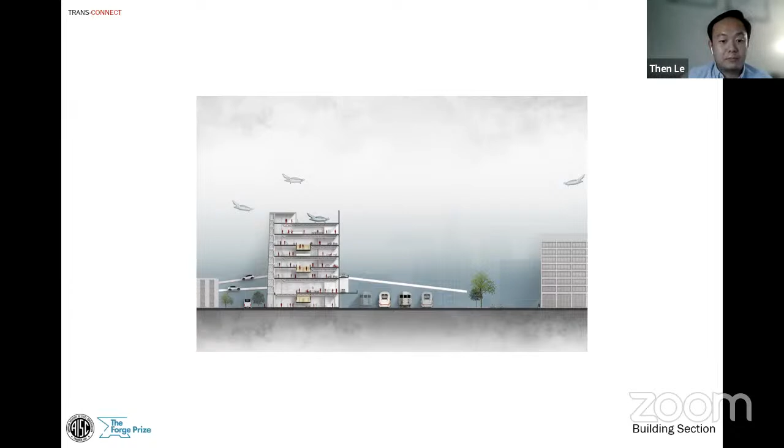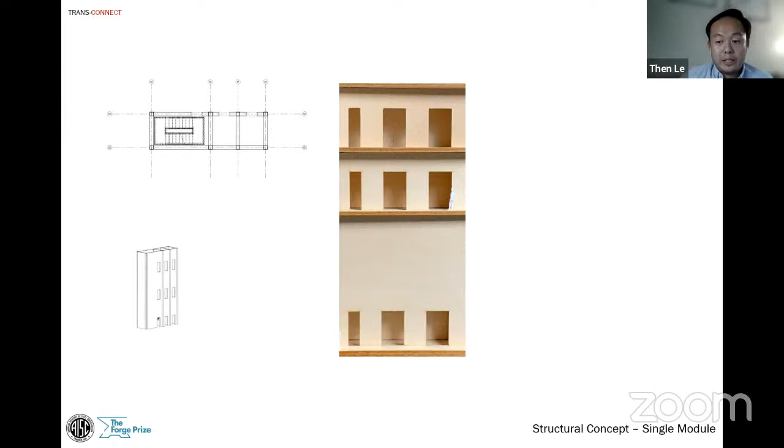So as you may wonder, how did I get to that final design? I began with a small design concept to access the skyport, which requires an elevator core to go up, so the initial phase of the design was a column. However, when I scaled up the design, with each span being approximately 200 feet, I encountered a problem: the structural core was at risk of collapsing due to the lateral force caused by strong wind or earthquake at this scale.

To address that issue, I revisited the design for the structural core and added a steel plate shear wall at both ends of the column, with each column end supporting the main truss structure. I created a wood model to demonstrate how this strengthened the building, and this is how it looks in 3D view when we scale up the structural core.

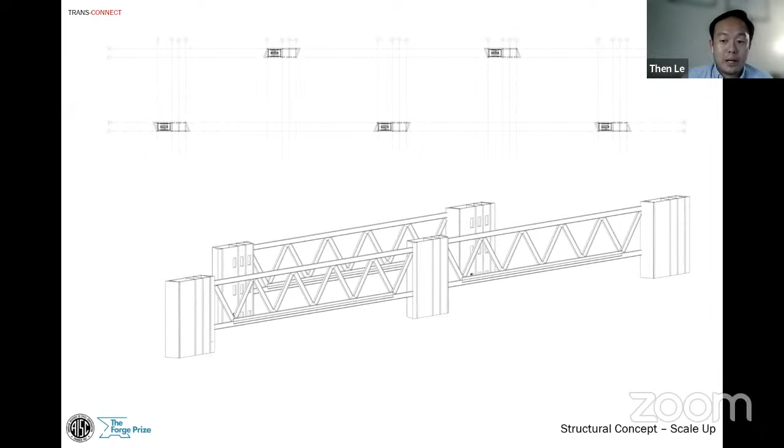Then, in order to minimize the number of structural cores required, I explored an alternative structural design. This approach eliminates the need for parallel cores. This floor plan shows the design of the entire core structure system, and this slide demonstrates the structural components in each core module. Overall, the system consists of three main components: flooring, vertical core, and the trusses that reinforce and stabilize the building.

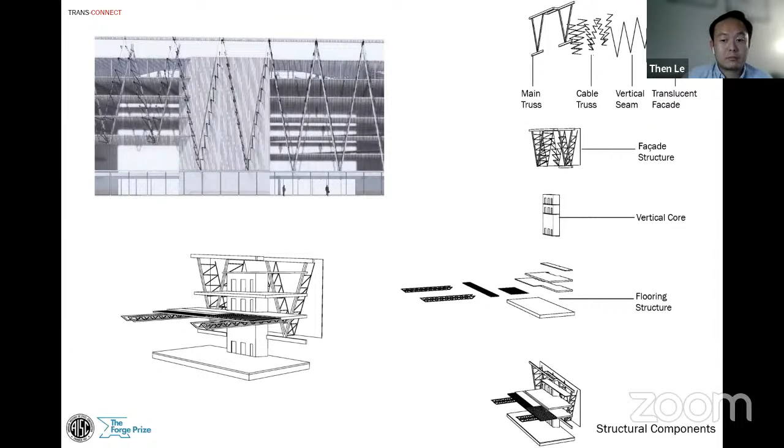Thanks to Casey, my mentor in fabrication, who provided me with a deeper understanding of detailed elements that an architect may not be familiar with, this drawing demonstrates how the structural elements come together to support the overall architecture design.

During my mentor sessions with Casey, I learned a great deal about terms associated with steel fabrication. Thanks to Casey and Alex again, such as AESS, which stands for architecturally exposed structural steel. This term refers to the use of structural steel elements that are visible and exposed in a building design. Due to the scope of this project, not all the structure can be AESS4 or AESS-C, which is the highest showcase element category.

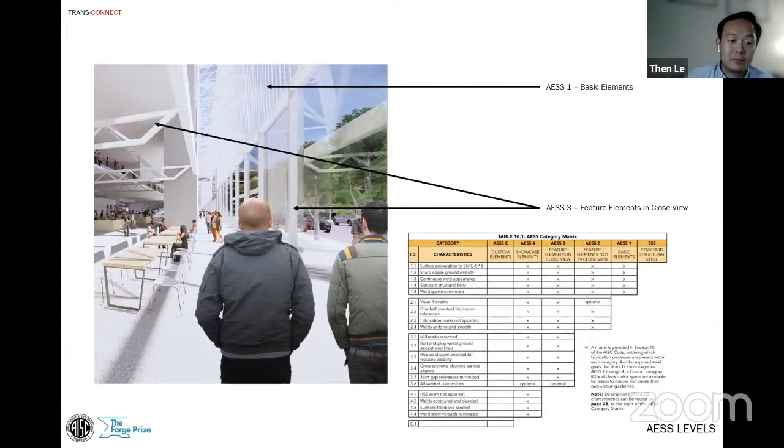So I divided the structure accordingly. For instance, in the top view, I selected AESS1, which is a basic steel structure, and then categorized all the cable trusses that hold the facade as AESS2 because I think the steel structure is more than 20 feet from the human eye. The beam below falls into AESS3, and the main big truss should show aesthetic appearance, which I believe should be classified as AESS4.

During our discussion on sustainable design, Casey introduced me to the concept of thermal break, and I think that's a brilliant idea I would like to incorporate into this building. A thermal break is a material with low thermal conductivity placed in an extrusion with the purpose of reducing the flow of thermal energy, so that it prevents heat from the outside reaching the inside of the building.

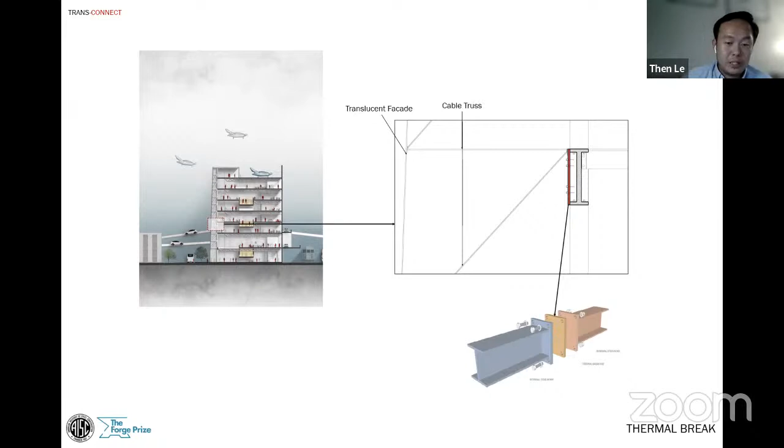I also discussed with Casey about the steel color. I want it to be white. So I was debating between hot dip galvanized and the metallized coating, also known as thermal spray coating, TSC. And finally, I chose the TSC as my choice.

For this type of project, the TSC would be beneficial due to the long service life under most conditions. They can be applied regardless of ambient temperature and humidity, and tend to have a better resistance to physical impact.

To ensure safety and accommodate the project size, the use of prefabricated components manufactured offsite is preferred. This approach leads to faster construction time, cost saving, and higher quality control than being done on the construction site. Furthermore, I think this method also promotes sustainability by reducing the environmental impact of a commercial construction project.

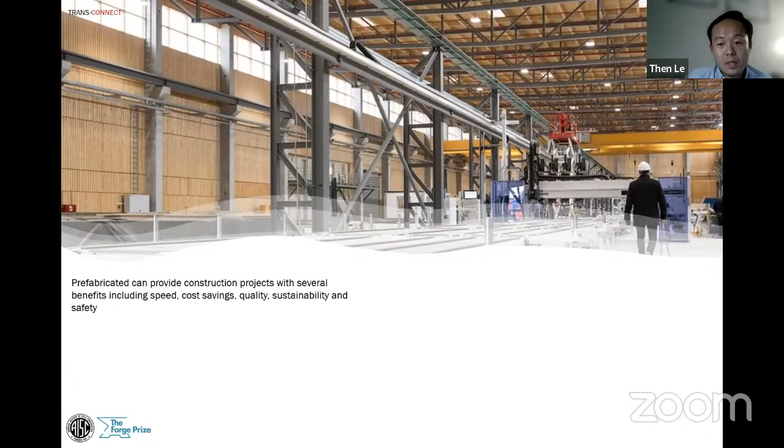Thanks to the discussion with Rona and Melanie during the jury meet, you may wonder how the case study can be applied to other cities. For instance, is it possible to build a skyport within existing infrastructure, such as a parking garage rooftop?

In this scenario, the skyport location, known as the vertiport, can be placed in various positions depending on the parking garage shape. So additionally, you could have 2 or 3 boarding areas established around it, allowing for easy transition. To demonstrate this concept, I showcase how a car can conveniently drive up to the final destination before boarding the air taxi terminal.

Here's the final layout that I suggested for the design, for the skyport, that can be applied to any city around the world, including bigger cities in Texas, like Houston, Dallas, or Chicago, or even New York.

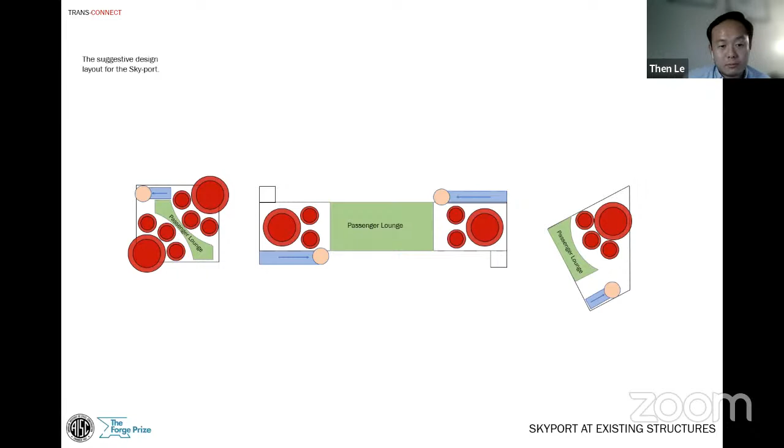So yeah, thank you for listening. I'm grateful for the opportunity today to present with all you guys, and hopefully our profession can design an adaptable infrastructure building that aligns with new technology in the transportation system. So thank you all, and glad to see all the good work from each team.